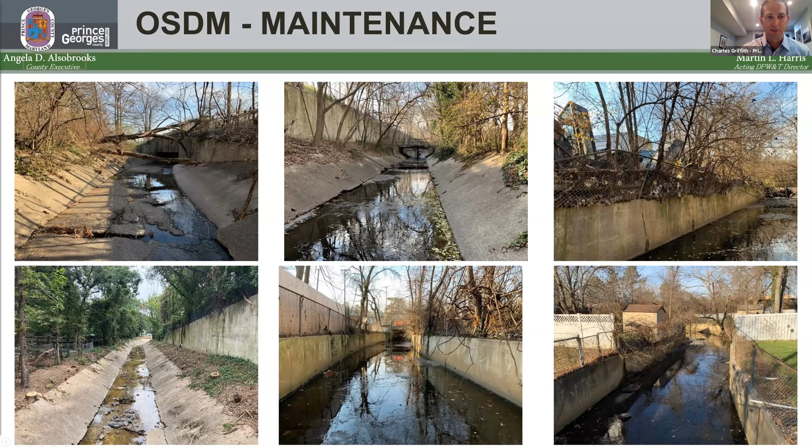And with that, that's the update on the maintenance, and I'm going to turn it over to Irv to get into the bulk of the presentation.

All right, well good evening everybody. As Charlie indicated, I'm Irv Beckert, Chief for Highway and Bridge Design Division here at DPW&T. Thanks for inviting me and our team to this meeting. So my division recently took over project management for this channel project, so I'll give you a little bit about it.

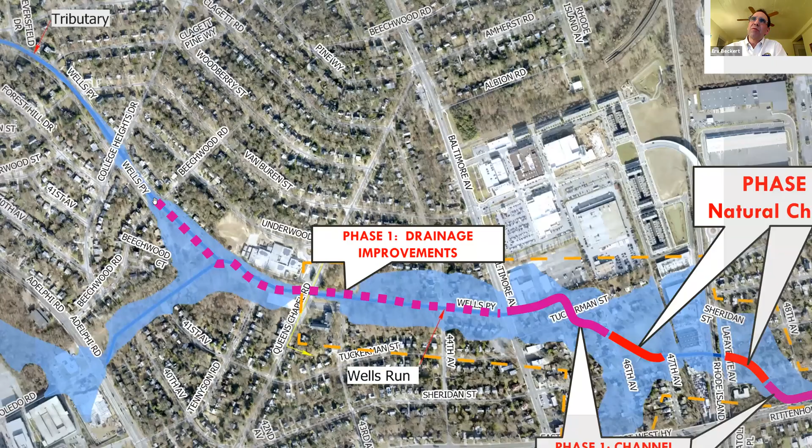The project is broken into two phases. Phase one is comprised of drainage improvements along the surrounding roadways that discharge to Wells Run, between Beechwood Road and US 1, Baltimore Avenue. I'll zoom in on that.

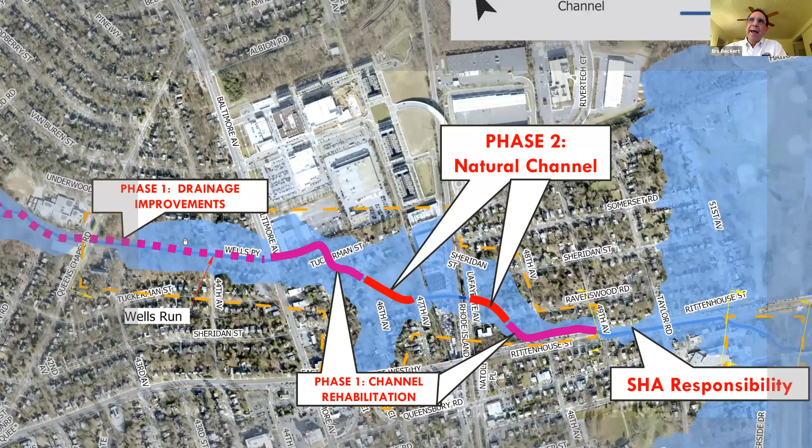The concrete channel rehabilitation is broken into two segments, between Baltimore Avenue and 46th Avenue, which is about 800 linear feet, and another segment between Ravenswood and 49th Avenue, a little under 800 linear feet.

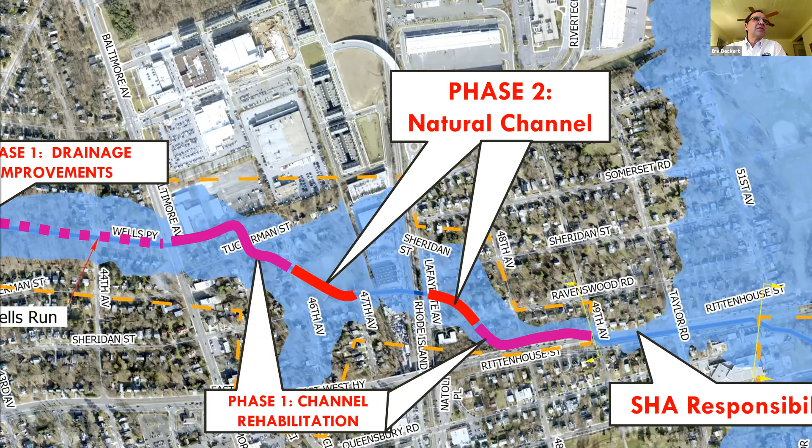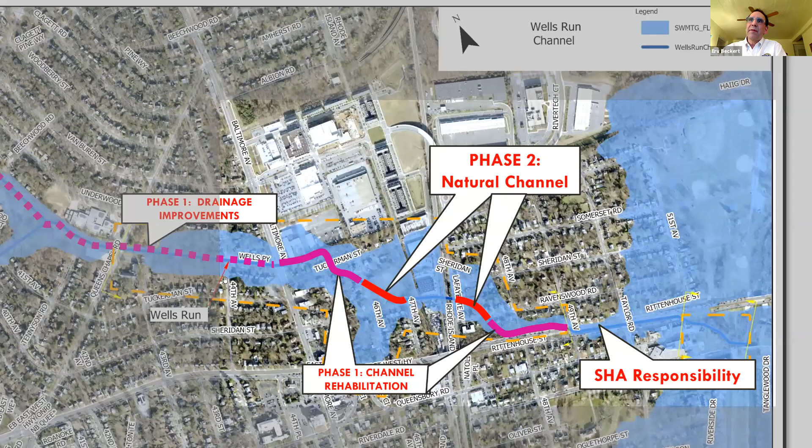Now, phase two is related to natural channel establishment, taking the old concrete lined channel and converting it to a more naturalized channel. There are two segments for that as well. The first is between 46th Avenue and 47th Street, up 47th Avenue, and between Ravenswood and 49th Avenue. The second segment is after the railroad tracks, past Lafayette Avenue, between Sheridan Street and Ravenswood. So it's shown in red here, section 2 and section 1 up here by 47th Avenue.

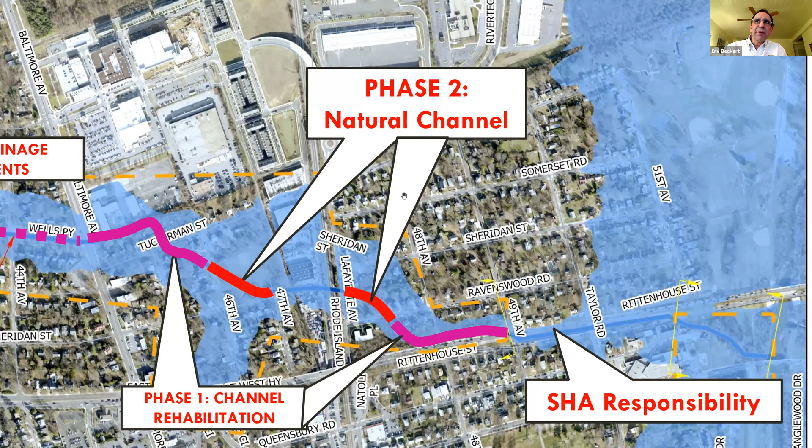Please let me know if you are having any problems seeing or hearing.

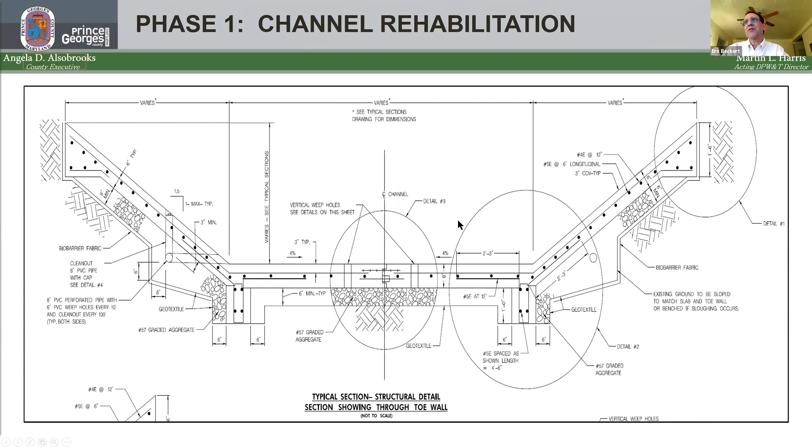So phase one, the next steps related to this: of course we're going to continue the ongoing maintenance work that Charlie described. We will be, in short order, completing the drainage improvements engineering, identifying where those curb cuts need to be, making sure we have safe and legal conveyance. Then we'll submit our final design plans for the concrete channel rehabilitation to our procurement team. At that point, we'll procure the construction services and go to construction. We expect that we'll have the drainage improvements and the channel rehabilitation under construction in the upcoming fiscal year 23.

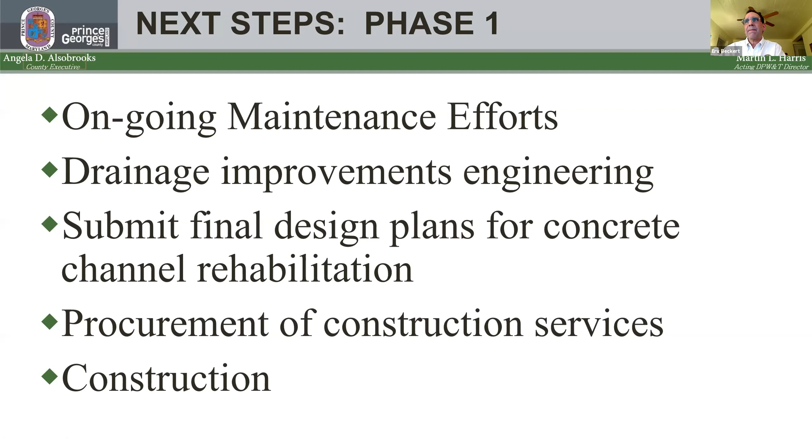The second part of phase two is the result of some very good collaboration with our partners at Park and Planning earlier this year, where we've added this excellent piece to the project. This is an overall view of the second segment area. As you can see, the railroad tracks are along here, parallel to Rhode Island Avenue and Lafayette Avenue. The area in question is this green space here, and I'll show another image to give it context. This is Lafayette Avenue and Ravenswood Road. This green space here, which is controlled by Park and Planning, is the second piece that we've added to this recently. Again, very grateful to our partners at Park and Planning for suggesting this. We'll be engineering this and working with them on it, but that work is just starting.

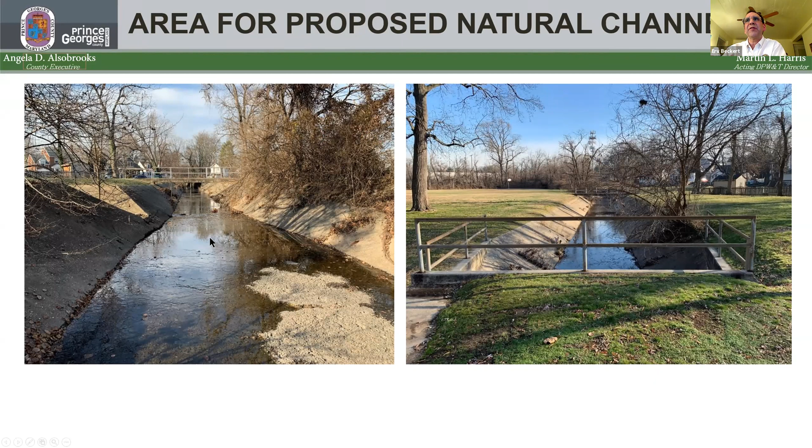These are some sample photos of various elements that we would introduce into a naturalized channel: riffle pools, the imbricated rock wall, and really a conveyance system which is not following a straight line. It's intended to convey water in a natural fashion, and the reason we're able to do that here is because those two areas that I showed you have a bit of space. Very rarely do you get this opportunity where you have actual room to widen your channel in a developed area. So we will be widening the channel.

We will, in a marginal way, be adding channel capacity, not in a significant way, but that additional capacity will reduce the peak flows and will produce a modicum, just a small amount of flood control. I don't want to make promises that we can't deliver, but it will at least provide a small improvement in the peak flow discharge. We'll get a better idea of the exact reduction as we finalize our design.

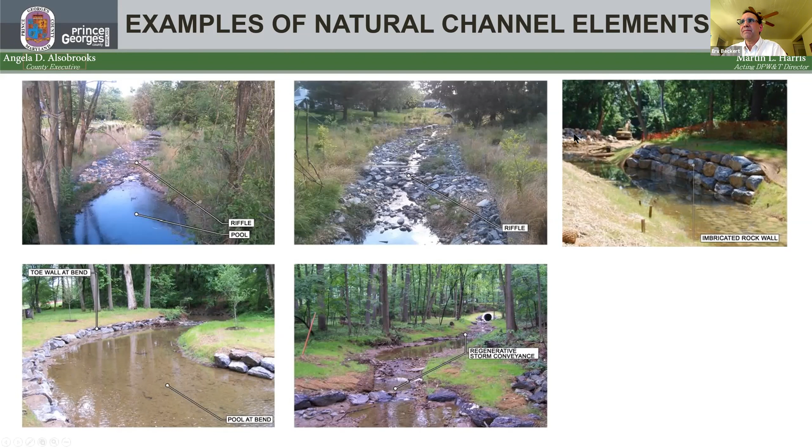Another outstanding benefit to phase two is the creation of habitat. We are going to use native plantings. That environment that we're creating is a real environmental habitat for wildlife. We're sustaining the pollinators that we desperately need to sustain this environmental system that's being put in place, and to support the area around it. So rarely do you have opportunities to do this, so we have a chance to do that here.

Finally, it always needs to be put in context. This is a flood control system after all. So the Wells Run drainage area, we are studying this extensively because we're about to modify the drainage characteristics of this channel. In order to do that without negatively impacting any surrounding residents, businesses, or government entities, we want to make sure that flood control needs are being met. The actual channel segment being rehabilitated is just this yellow area here.

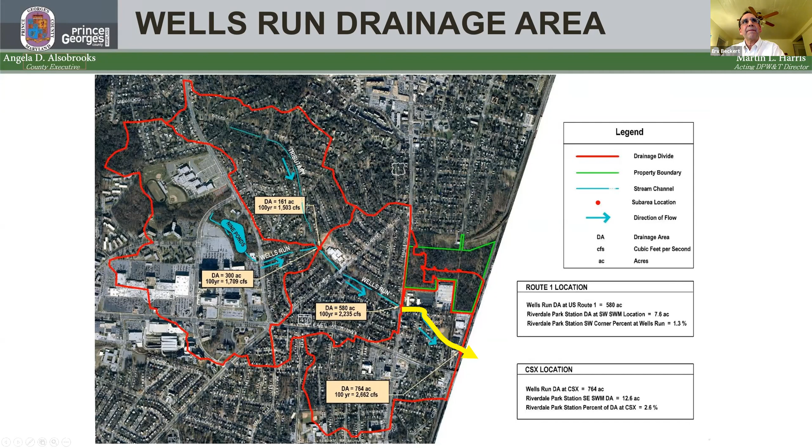So what are our next steps in phase 2? Floodplain review, which I described, is rather extensive. We'll still need approval of the existing model, which is currently under review by DPIE. We will need to develop our proposed model within the direct project limits. And in all likelihood, we'll have to submit a LOMR, a letter of map revision, to FEMA. All of these take an extensive amount of time.

Our design: currently, we're coordinating with Park and Planning and the other property owners to arrive at a final scope of improvements that respects their rights while still meeting the mission statement of the project. We're currently at a 30% design level. Once that's complete, we go through various milestones: a 65% semi-final, a 90% plan review, and then final advertisement contract set development. All of those mean review by the stakeholders and further refinement of the design, but it results in an excellent design at the end of the day—sound from an engineering standpoint, maintainable, safe, meeting regulatory requirements, and satisfactory to the citizens who live around this and the business owners that might be impacted.

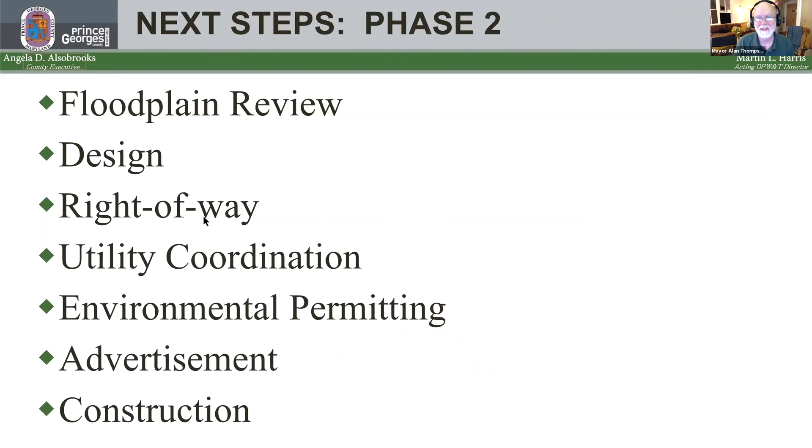That's fantastic news. Okay, I see that Councilmember Foe has a question, but I'm going to rudely butt in front of him and ask a few questions myself, unless he yells at me too loud. So if you could please back up to the slide that has - yeah, that's the exact slide I wanted to see. Okay, I will tell you, if you can zoom in on the area that has phase 1, phase 2 on it.

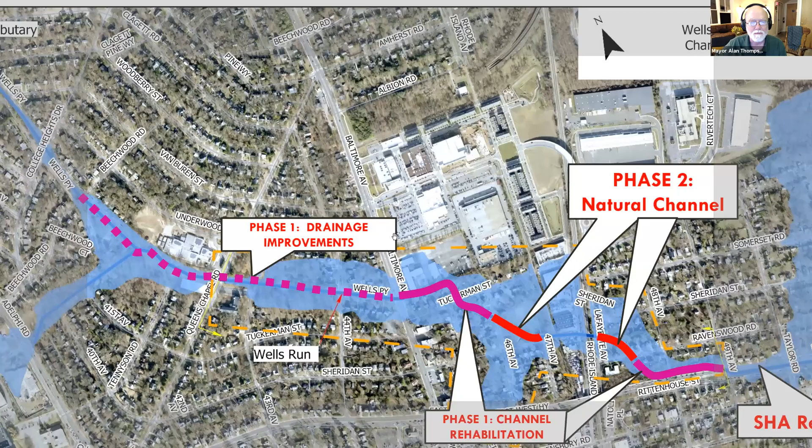Okay, that's great. So I have to say I was quite surprised to see this. This is not what I was expecting at all. And I'll tell you that the downstream piece of phase 2 - and I verified this in PG Atlas during the presentation - that there's no Park and Planning property down there. There's a little bit of Prince George's County property, and a lot of private property in the downstream piece of phase 2. So my understanding of phase 2 was that the upstream piece, the piece that's in the park, was going to be significantly expanded from just modest improvements to the channel.

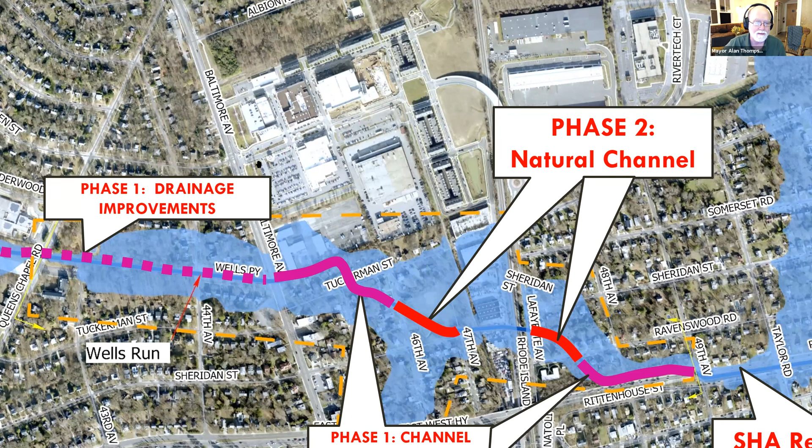And so perhaps if you can, there's a photo you had at some point that had the streets and the phases on it, zoomed in on that part. But there's a baseball diamond in there. That's perfect, thank you. There's a baseball diamond.

There's a large open field, and the thought we had in the community is that that entire space could become a surge stormwater storage space. So there'd be a naturalized channel on the southwest corner, and then on the rest of that area, perhaps have large quantities of soil removed and some slopes put in down from where the playground is and of course where the trolley trail is. That could store a lot of water, because where the trolley trail goes and where the train tracks are, those are both pinch points.

And that's where the water backs up. That's where, on September 10th, the water backed up and flooded this neighborhood, from that underpass underneath the trolley trail. So that's what I was expecting - not that we were going to get a naturalized channel on the other side of the railroad tracks. Just wanted to get that comment out very quickly.

Yeah, Mayor Thompson, thank you. Just to clarify, between Lafayette and Ravenswood, M-NCPPC had reached out to the county, letting us know they were working on that property acquisition. As you mentioned, Prince George's County does own one of the parcels that the channel runs through.

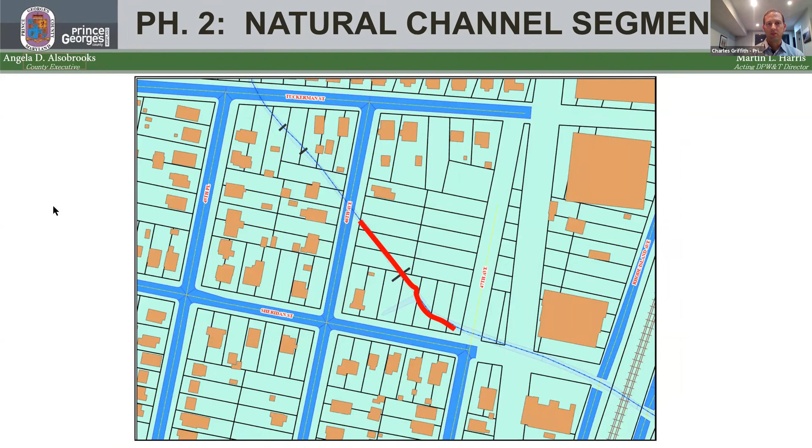So as we understand, those property acquisitions are moving forward between the county and M-NCPPC. Between Lafayette and Ravenswood will be fully owned by the county and M-NCPPC. So we are waiting on confirmation from M-NCPPC. Laura Conley's been fantastic in giving us updates on where that stands.

And then the second piece, just to jump in on that again - M-NCPPC, if you go back to the slide adjacent to the park, they have not agreed to let us expand into the park. They have agreed to let us use the two triangles to the south of the channel. They've given us full access everywhere to the south side of the channel. So as Irv mentioned in the presentation, we are able to significantly change that and open it up.

So there's, in essence - I don't want to use the word wetlands because that gives a false, low-lying impression - floodplain, I guess, is maybe a more accurate term for what that would look like.

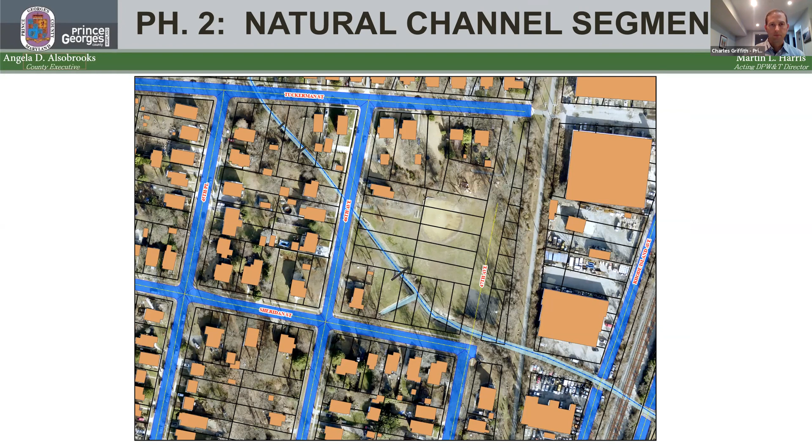Okay, well, I spoke at a planning board hearing on parks last year and asked them to be flexible in this way. I guess I'll go back and talk to them again and see if we can get a little bit more openness in that area.

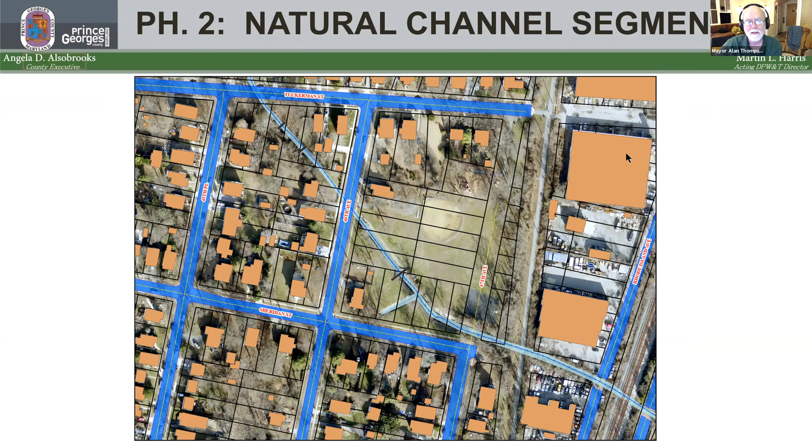The other piece of the presentation that sort of jumped out at me was your discussion of enhancements on the upstream side, the drainage improvements in phase 1 on the upstream side. And I don't know...

Exactly what the complaints from that neighborhood are that's not in Riverdale Park. My understanding is that the main complaint was from a person very close to Baltimore Avenue who, when the water backs up, it ends up in their basement and yard. So of course they're not very happy about that. And not that there was water ponding on the streets. It in fact seems that increasing drainage from the street into the channel is counterproductive to the work that's going on at Nine Pond and elsewhere, which is trying to keep water out, to keep water on site in various places during storm events. So I was wondering if you could comment on that.

The intention is to actually deal with the very low volume of the smaller events. These are the nuisance type events. This is the channel itself - its capacity is not at all impacted by this.

That water in a curb cut that we're creating is only going to be effective for very small rain events. It's simply going to prevent ponding along the roadway, maybe provide some drainage relief for backyards or front yards where there's some low-lying sumps that just need some drainage. It's in no way going to affect the operation of a 10-year, 50-year, or 100-year event. That water is overwhelming that curb cut at that point - it would flow exactly as it flowed.

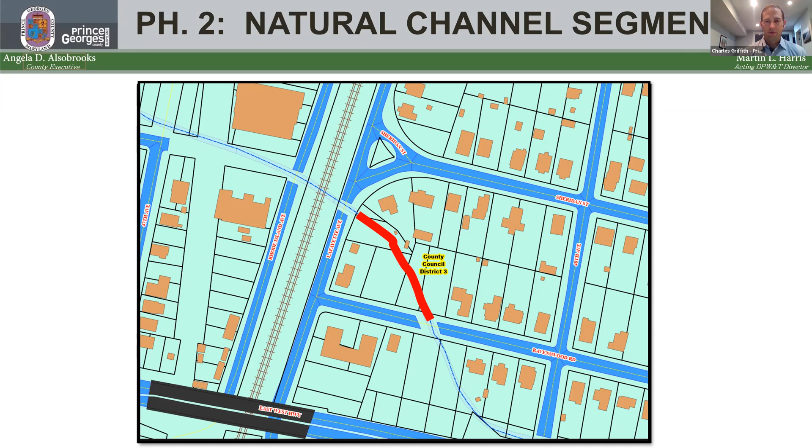And I will fully say that we've already looked at some of those sections back through Ravenswood and Lafayette, 48th, 49th, and you can already see that understory kind of coming back in, which is fantastic. And that's what we want. We want that smaller understory in and adjacent to the channel. What we don't want are the large trees that are falling down, getting into the channel, blocking the culverts.

So what we're looking at, again, from a long-term maintenance perspective, council member, is that our channel through this section, we're not going to be able to naturalize it from Ravenswood to 49th. With the homes present there, there's just not enough room to naturalize that segment, which I believe was a previous question over the last couple of years, if it was able to be naturalized the entire length. I think we've previously talked about that, but the understory, again, we fully expect it to return in a very quick manner. We are looking at it, we are monitoring it. If we feel we need to do anything in the interim, we certainly will.

And I hope that answered the question. If not, feel free to follow up. I believe it does, and I'll let the folks over there know that they can check out this segment, and I'll make sure I pass on contact information to them in case they do want to get in touch with me.

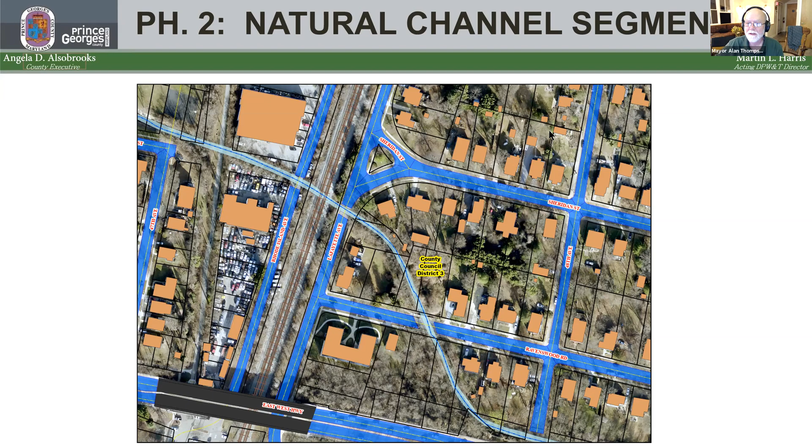Yeah, not a problem at all. Thank you very much. Great, thank you. Okay, are there any more council questions, or shall we move on to see if there are members of the public who would like? I saw a few heads shake, so unless I see a hand go up, 3, 2, 1. Okay, are there any members of the public who would like to ask questions?

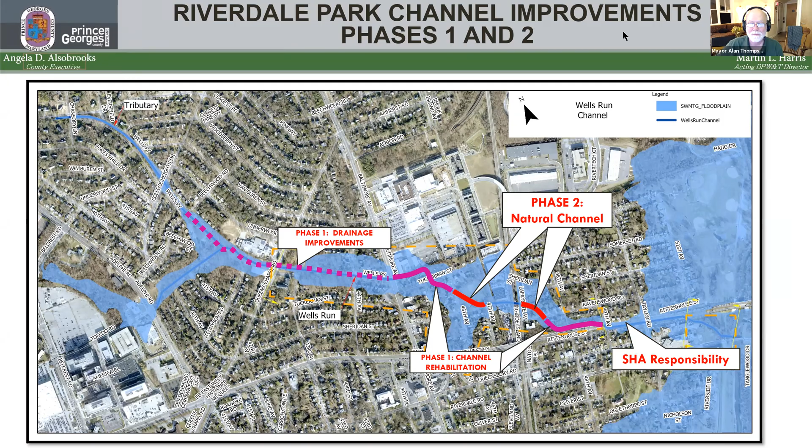Okay, sounds like we may have gotten to the end of our questions for this evening. Well, thank you very much. I appreciate you, everyone coming out and speaking to us this evening and updating us on the status of the project. And I think we'll be communicating over the next several months to see how progress can be maintained. So thank you very much. Appreciate you coming. Thank you very much. Have a great evening, everybody, and just give me a call if you need any information on this project. Will do. Thank you very much. Let's take care. Thank you, Mayor Thompson, and I'll provide our information in the chat as well. Thank you. Fantastic.

Okay, next on the agenda is my report, and I don't really have a report this evening. I had a very busy weekend with some family issues, and so nothing prepared, but I will take a little bit more time to welcome our newest council member, Richard Smith. Swore him in about 2 hours and 20 minutes ago, and so welcome, Mr. Smith. We are very, very pleased to have you, and we look forward to working with you on many issues of mutual interest. So with that, let's move on to the town manager's report.

Yes, thank you, Mr. Mayor and members of council, members of our community and the staff team. A few things this evening. We have been in contact with WSSC, reference the project over the Anacostia. So people may have seen large sandbags being placed in the river there. And that is to divert the water to allow for replacement work on a lateral sewer line. And so the project has been in the planning stages for many years, is what we have learned.

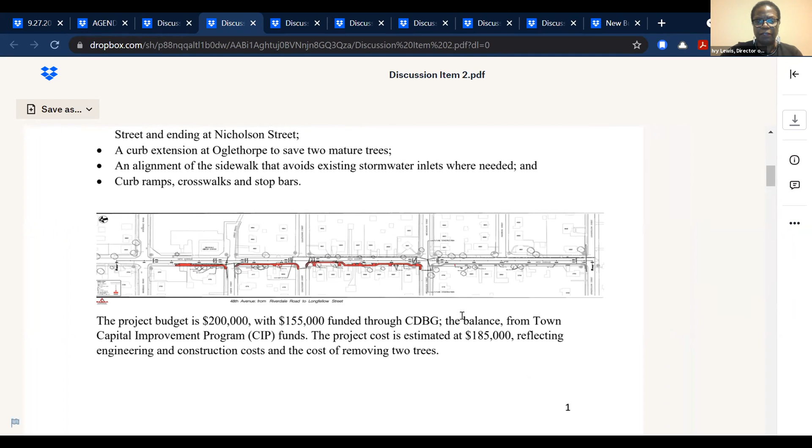Instead, I'm going to provide a briefing on 2 capital projects and the solicitation process underway to select a contractor to build these improvements. Starting with the 48th Avenue Sidewalk Project, I'm happy to announce it's back on track for completion after a delay to comply with the requirements of the Federal Community Development Block Grant Program administered by Prince George's County. The town received $155,000 from the program and added $45,000 of capital improvement program funds for a project budget of $200,000.

The project consists of the installation of a sidewalk on only the west side of 48th Avenue, starting mid-block between Riverdale Road and Oliver Street and extending to Nicholson. The scope of the project initially was much broader.

However, given the limited budget, the obstructions on the east side of the road primarily, and the possibility of triggering costly stormwater requirements, the project was scaled back to consist of a sidewalk on the west side, mid-block between Riverdale Road and Oliver, extending to Nicholson, whereas initially it was expected to extend to Longfellow Street.

The project will also include a curb extension immediately south of Oglethorpe to save 2 mature trees, a sidewalk alignment that avoids several existing stormwater inlets along this stretch of road, and curb ramps, crosswalks, and stop bars at intersections.

The project is estimated at $185,000, considering engineering and construction cost and the cost of removing 2 trees that were removed last year. You have within your staff report an image of the design.

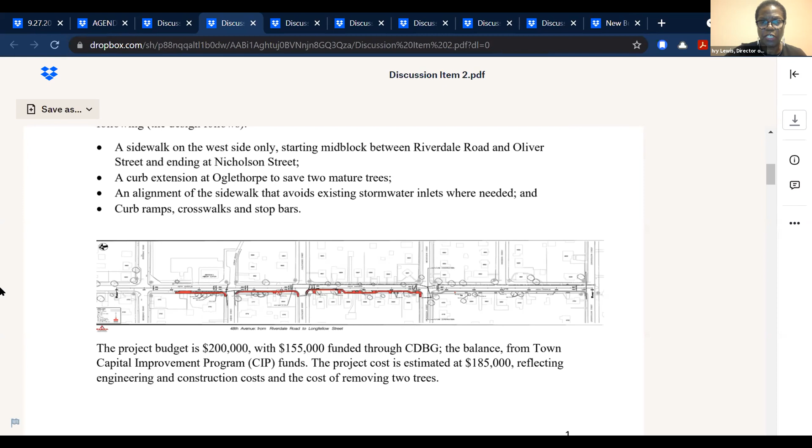The second project is the Taylor Road curb and sidewalk project. It is a stormwater project with a key objective to prevent stormwater from flowing onto private property from the street.

There is inexplicably a mountable curb. I have no background in why that is, but a mountable curb in front of 6409 and 6407 Taylor Road. The rest of the block has a standard height curb.

The sidewalk and driveway apron and tree box, the area between the sidewalk and the curb, are sloped in the wrong direction, actually towards the front yard of 6409, so that stormwater flows onto the property and contributes to front yard flooding. The resident at 6407 has actually addressed the flooding situation with improvements on the property.

So the town project is focused entirely on 6409 and involves the installation of a standard height curb at 6 inches and replacement of the sidewalk and driveway apron at the proper grades and regrading of the tree box to channel stormwater to the street and keep stormwater from entering onto the property.

The project budget is $220,000, including engineering and construction costs.

Staff released an invitation to bid for construction services about 30 days ago for both projects, and we're delighted to receive bids from 11 contractors, all of whom bid on both projects.

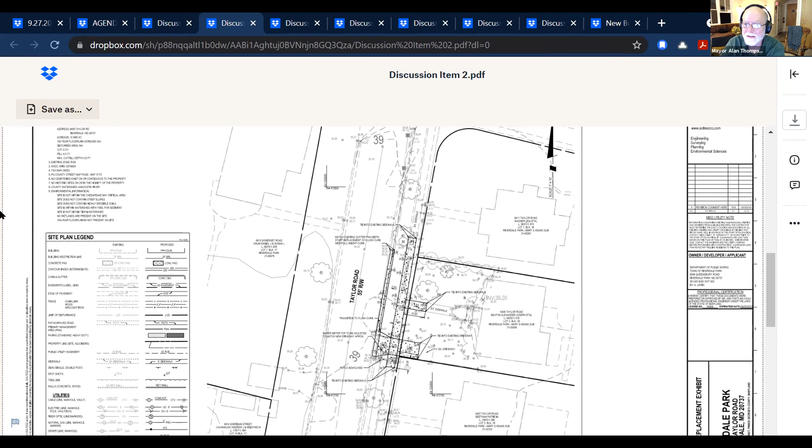Yes, Mr. Mayor and members of council. As it is spelled out in the staff memo and the draft ordinance, we would change or amend the town's personnel manual by adding a section to our workplace safety area. The edits will require vaccination. There will be required exemptions for sincerely held religious reasons or for medical reasons.

There will be a period of time for employees to report vaccination status. Right now we're saying at the end of the calendar year. And then if employees are not vaccinated by that time and have not received an exemption, they will have, I believe, 10 days to begin the process.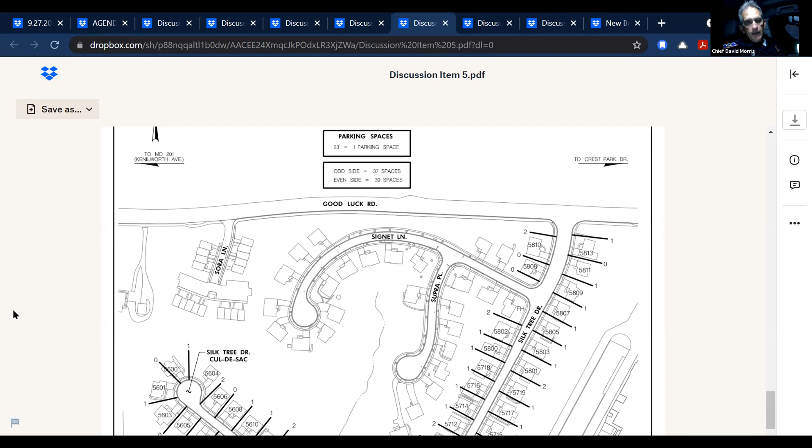So we have too many permits out there, that's the bottom line. If you scroll down the map, there are a lot of spaces near the stormwater facility or the playground, which most residents would find less appealing than parking in front of their house. Most residents like to park directly in front of their house. The times I've visited the neighborhood, I've seen empty spaces down there, which means the spaces away from there are even more in high demand and are almost always filled, which is what I've seen also. Just wanted to clarify that.

Are there other council questions on this presentation? Yes, I have one observation. This is my recollection of Silk Tree Drive, Councilmember Sadiq, correct me if I'm wrong. A number of the homes there have pull-in garages, and I believe some have double bay pull-in garages. Are residents making full use of those garages as such, or have these garages become external storage areas or other uses?

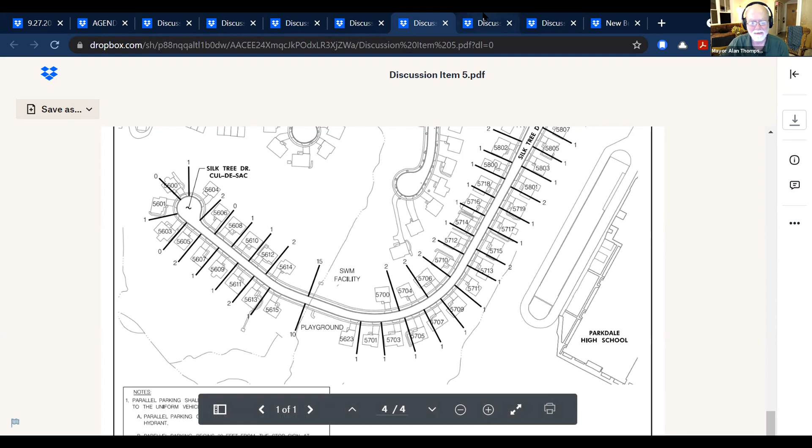So let's move on to the International Property Maintenance Code. Mr. Chelton. Yes, good evening again, Mayor and Council.

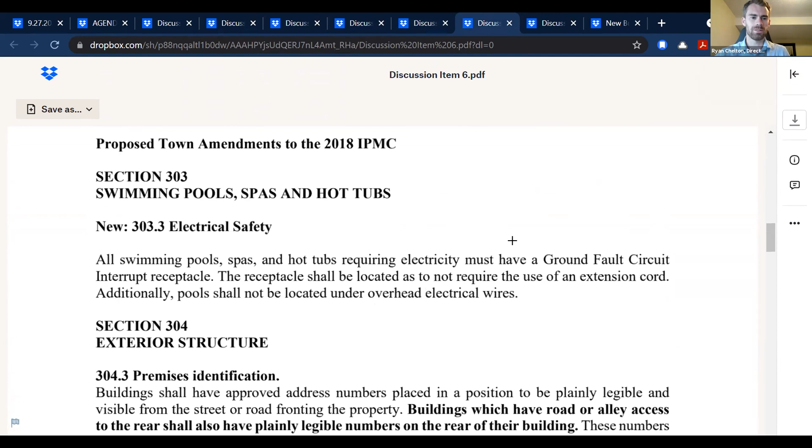Yes, so let's find the best place to move my screen so I don't have to try to do two things at once. Okay, that'll work. All right, yes, good evening, Mayor and Council.

Historically, the town has adopted the Prince George's County Housing and Property Standards Code by reference in our town code. This code at the county is a version of the International Property Maintenance Code with some of the county's amendments. The county's adoption has narrowed the scope of the International Property Maintenance Code to only reference residential buildings, and this leaves our staff with limited tools in order to address conditions at commercial and industrial properties.

Recently, the county has updated to one of the more recent versions of the International Property Maintenance Code, the 2018 version. The county code is still amended to only reference residential properties.

And so as the county has updated their code and as we adopted by reference, our town staff has been using this when assuring that residents are in compliance with the town code.

Staff have been reviewing and studying the 2018 International Property Maintenance Code over the course of many months. During this time, the staff has spoken with the mayor and council about proposed amendments to the 2018 International Property Maintenance Code for when the town would adopt it itself with amendments.

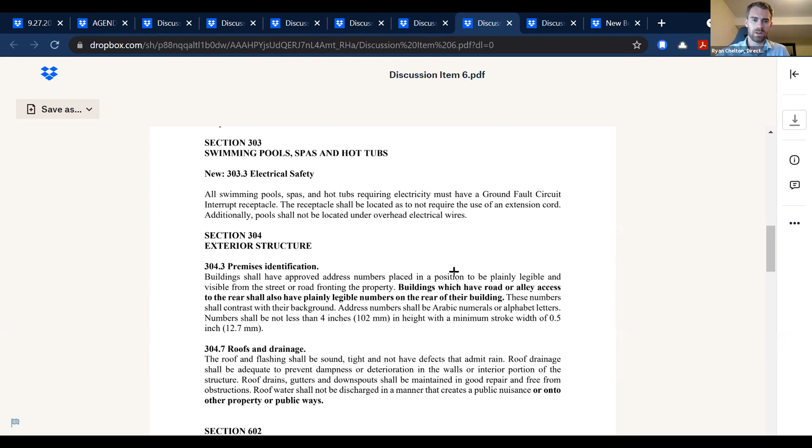Here are some of the listed amendments that we had discussed in previous meetings, and those are included in the meeting materials.

In addition to the amendments in the meeting materials, there are a variety of housekeeping amendments that will need to take place. These amendments are administrative and include items such as designating the town department to enforce the code, naming the code, publishing the fine amounts, designating an established appeal process, and bringing forward established standards in our current code.

Likely, in order for residents and other property owners to better understand the code, the town will enter into a licensing agreement with the International Code Council so that the town may reproduce this model code with local amendments embedded.

Yes, so if there are any questions on the adoption of the International Property Maintenance Code 2018 with amendments, I'd be happy to answer them. Thank you, Director Chelton. It looks like Councilmember Sadiq has a question.

I believe you're muted, Councilmember. The bold wording is what's being added. That's correct, yes. So the existing wording is that which is written without the bold, and then the bold is what we have added based on conversations with mayor and council in prior meetings.